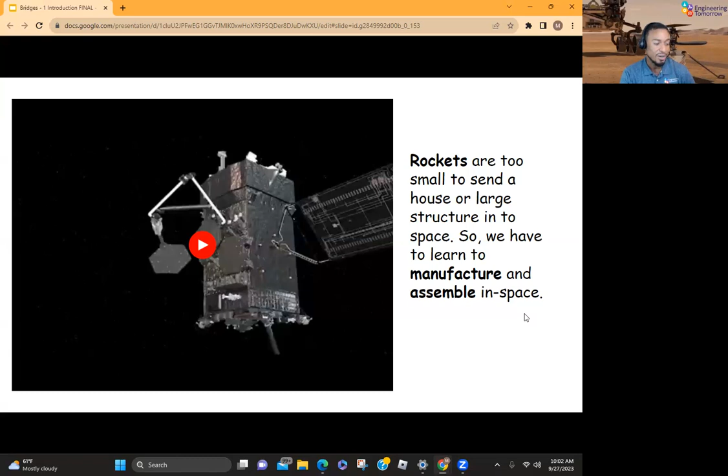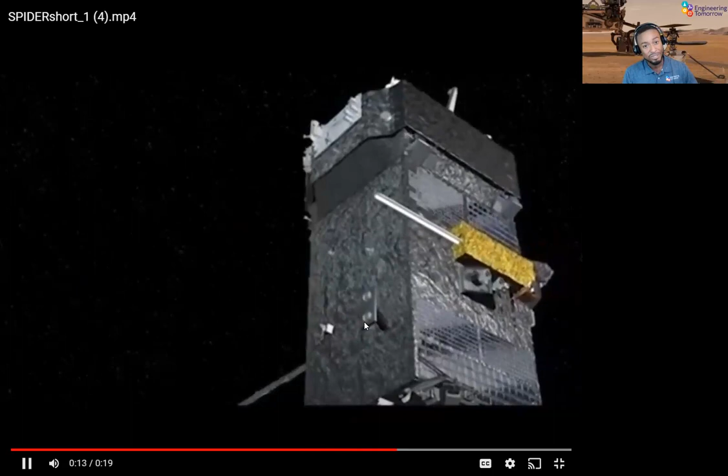What do I do? I am blessed and absolutely honored to be a space vehicle manager for a mission called OSAM-1. And the reason it is so awesome is because we're going to be fixing satellites in space, give them a little more fuel. We're going to build some structures in space, all of that great jazz. We're even going to build things in space like infrastructure, just like bridges, which we are talking about today. Maybe it'll be a bridge like this one day where we're building different structures to navigate the next satellites into space. Maybe doing some additive manufacturing on the moon, right? We would love to go to the moon.

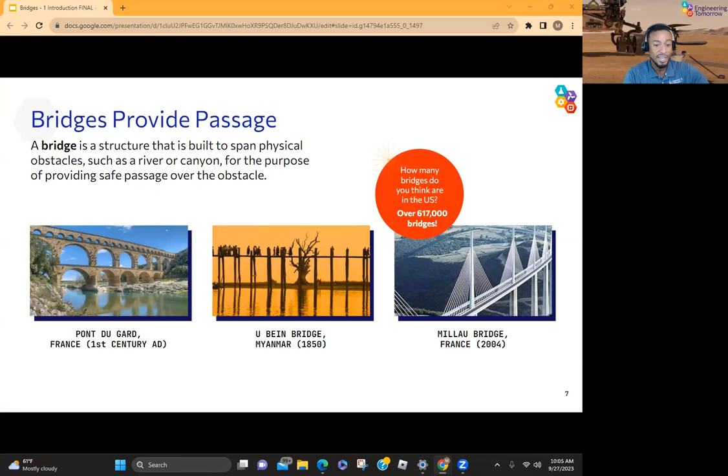And this is one of the reasons, you got to look forward to this. We're going to have a really great speaker for you today, Avery Bang. And her entire career has been around helping people that have limited resources by giving them access through bridges. And this fact alone, over 1 billion people don't have safe year-round access to education, to healthcare and markets. And Bridges to Prosperity, a shout out to her company. Bridges can give us that.

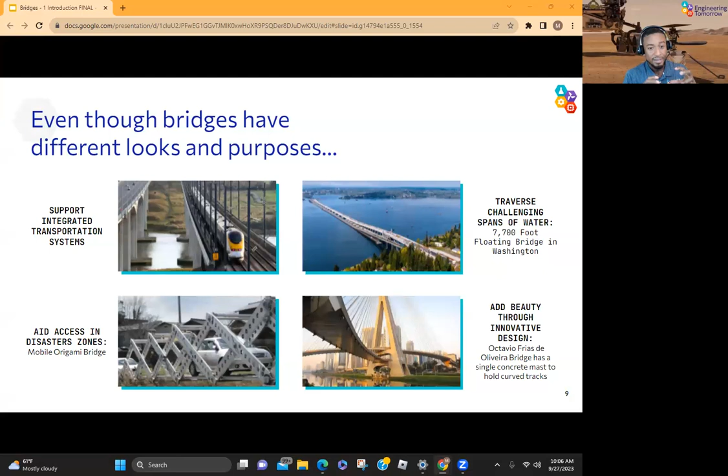All right. So let's talk a little bit about bridges. They may look different and they may have different purposes, but the beauty of it is, and when you can develop your own bridge, they all are built on the same fundamentals, right? You want to make a bridge that can support the absolute most weight while being efficient, while not utilizing too many resources. And you do this by controlling the forces.

Now we have some of the forces on this page. We have compression and we have tension, but there's also torsion. There's the twisting force, right? For longer structures, there's buckling. There's a buckling force you have to overcome. There's shear, the sliding force. All of these different forces are acting against this bridge, just like with you all in life.

There are different forces in life that act against you. There's pressure in life that acts against you as you try to make sure that you're doing the right things and moving forward and executing the vision you have and having fun, right? Getting through school, there's a lot of pressure. Social media, there's a lot of pressure. So what this all comes down to, just like in life and with your bridges, is how you balance all the forces. Can you balance them all? Right? Torsion, twisting, shear. Can you make sure that the structure is still sound through all those forces? And we're going to show you how to do that today.

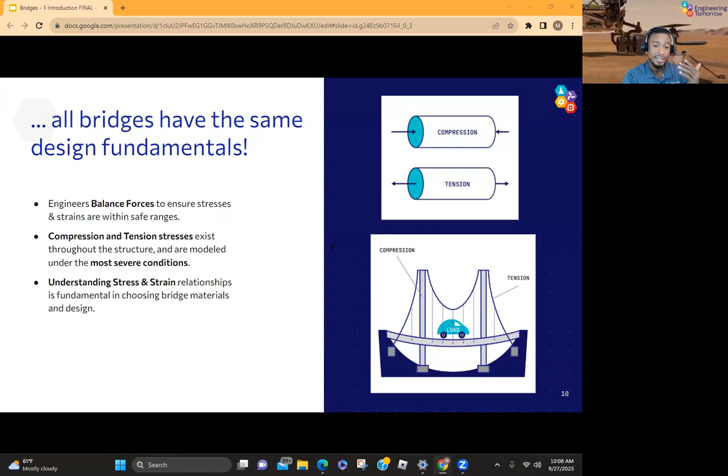And the other thing I really, really love about bridges is that in engineering, you can be innovative. You can still be creative and artistic. Yeah, you balance the forces. Yes, they provide safe passage, but look at the artistry that they've added to these bridges in creating safe path. Unbelievable. So we want to give you some tools. Let me give you a few tools for you to think about as you're creating these great bridges.

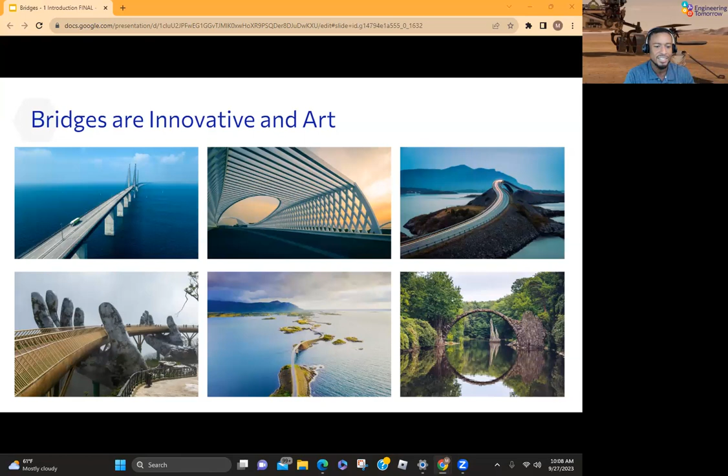Here are some really, really good shapes and structures, because shape matters. Shape is really, really important. So one, there are beams, right? I'm highlighting some beams that you can utilize to provide good support. And when you have a beam, it doesn't have to just be straight across. If you add arches to a bridge, that shape is probably the strongest shape you can create. But if you're using like popsicle sticks and stuff, it may be hard to create arches, right?

There's also trusses. Triangles are very, very strong. Include some triangles in your design, and that not only distributes the load, but it increases how much strength and inertia that you have to be able to support more. So I talked about arches, and we talked about trusses. There's also some cable-stayed and some cantilevers that you can use as well.

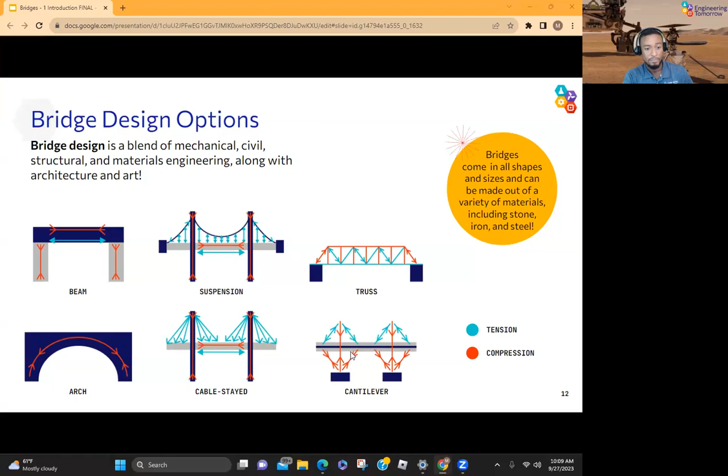So let me give you a little timeline. How did all this come about? Well, these bridges actually came about because trees were falling down across waterways. And people noticed, if I take advantage of this structure, this tree, I'll have safe passage all the way across this waterway. So they started very simple. And then people started to take advantage of, like you see on here, these Roman arch bridge shapes.

What shapes that we talked about can you identify even in this structure? You definitely can see a triangle, right? Even in this structure, you can see an arch. That provides a lot of strength to the bridge. And then they realized, hey, this is a lot of material to utilize. We're not utilizing this material efficiently.

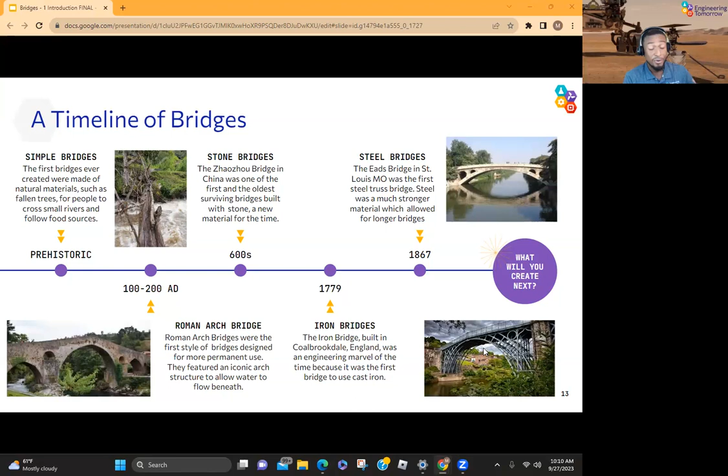Why don't we start incorporating things like concrete and steel and still have these very strong shapes. You see the trusses, you see the triangles, you see the arc, but far less material in order to create and maintain the structure on this bridge. So the big question is, what are you going to create? And that's what you're doing today. As a recap, you're going to develop a bridge, a functioning bridge that can support absolutely the most weight.

It's going to balance all the forces: compression, tension, shear, twisting, buckling, all of that. It's going to be designed using a very important tool as well, and that is the engineering design process. We're not going to leave you out there by yourself when you're lonesome. This is the ultimate tool.

It's the same tool that I've used to develop spacecraft like Artemis One. It's the same tool that they used to get the rover to Mars. It's the same tool that they've used to create outstanding medical devices that have given people an opportunity to have a better quality of life. So you don't just have at the design, which I love to do. I love to design, so I just have at it.

You start by asking some questions. First, what problem am I trying to solve? The problem that we're solving today is, can you support the most weight with the least amount of materials? And then, what research can I do? How can I learn from other bridges that are out there? How can I learn from other structures that are out there, right? Do a little research, then you design.

And if you design and you draw it out on paper, or maybe even do it in something like Google SketchUp, whatever tool you're going to use, before you build it, I promise you, you're going to make a better design. You're going to have a better design in the end.

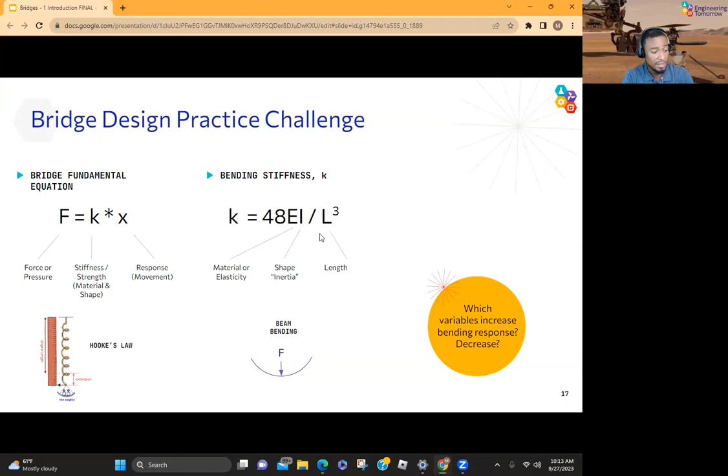And then there's an equation. You're like, man, Milton, why are you throwing an equation at me? There's an equation that governs all this. You may not need it today, but just to understand what's involved with the stiffness of the bridge, it's the material. This material, or elasticity: every material has a different elasticity. A rubber band has a different elasticity than a brick, which is extremely stiff, right? So you take your elasticity, you take your inertia, which is your shape. The triangles have more inertia, it's just in the shape. And you take your length, and that drives how stiff something is going to be.

And then, on the backside of that, when you have all that information, you can calculate how much it's going to deflect. And you want to minimize this deflection. So the more force you have, the greater the deflection. But the way that you reduce that deflection, how much it moves, is by its shape or by the stiffness of the material, the elasticity of the material. Those are the knobs you have to turn, right?

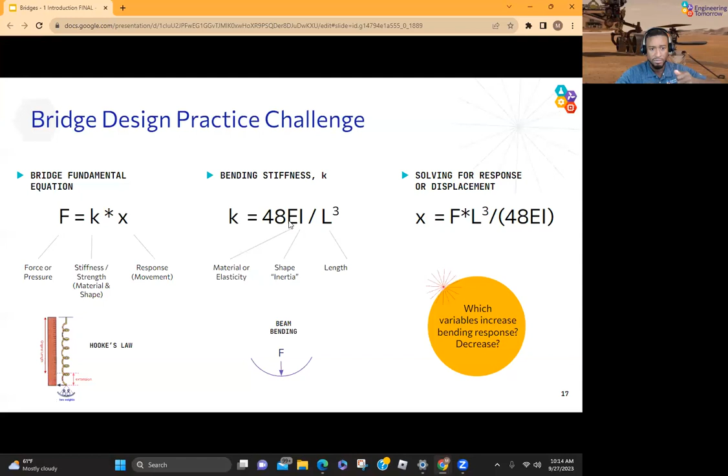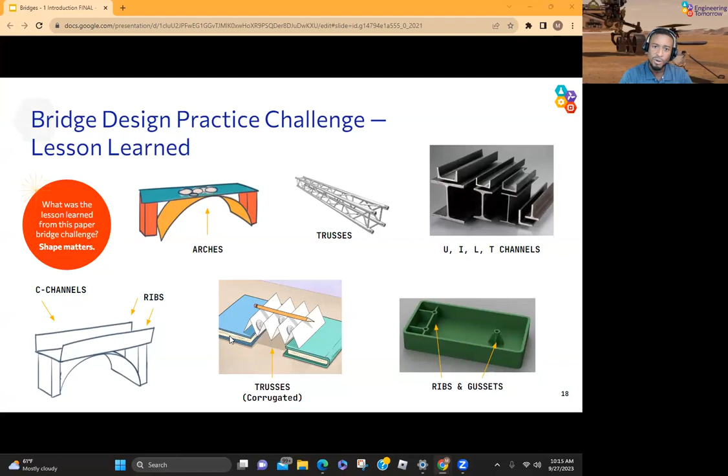Let me show you shape. Again, these are the shapes. Here's an example. An arc, a very strong shape. An I-beam, something that's taller with less material on the inside, less mass, extremely stiff shapes. You've probably seen it in ribs designed in certain structures. So try to incorporate this as much as you can. You probably get Amazon boxes. If you cut open that Amazon box, you'll see something called corrugation, because they have triangles and arcs in the corrugation to make it strong.

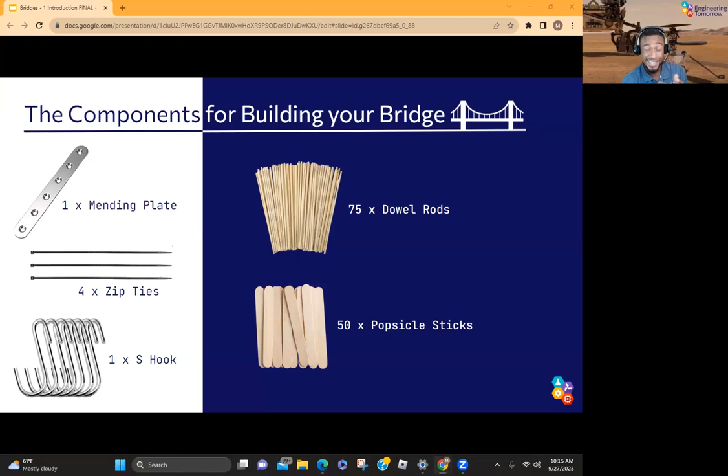All right. So here are some of the materials that we've given you. To test it, we've given you a mending plate. So you'll hook up the mending plate to some hooks, but also to make the bridge, we've given you a bunch of different dowel rods and popsicle sticks that you can put together with some glue, or some tape. That's part of your engineering problem. Do you want to use glue? Am I going to use tape? What are the benefits of using glue? What are some of the benefits of using tape? You got to figure all that out as you're making your bridge.

And as a recall of what we talked about first, what's the problem you're trying to solve? That's very important. Do a little bit of research before you start making your design. Create a design solution, maybe on paper, to kind of think it out with your team. How do we want to make this bridge? Then you build it. And after you build it, don't be afraid to fail.

Every innovation I've created, every patent that I have obtained, it's all come through failures. It wasn't the wins. It was things that I learned by failing over and over again. So you want to test it, and then you're going to analyze those results. And that's our challenge today.

But to make it fair, right? Because we can't have, let me see one of my schools out there. It's not fair if Mount St. Michael has titanium, and then Challenge Prep Academy, we only give them plastic. Or Mount St. Michael can make a small stiff bridge, and let me get another school, CMIT has to make a long bridge. So to make it fair, we're going to give you some constraints.

Here are the constraints. One, it only can be 12 inches long. Everybody's is going to be 12 inches long. All right. And then two, 3 inches wide or less. Okay. That gives us some constraints there, some boundaries by which we all can make sure this is fair.

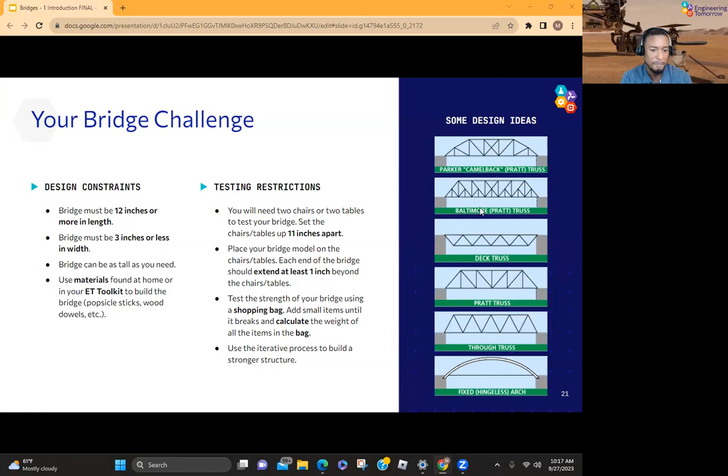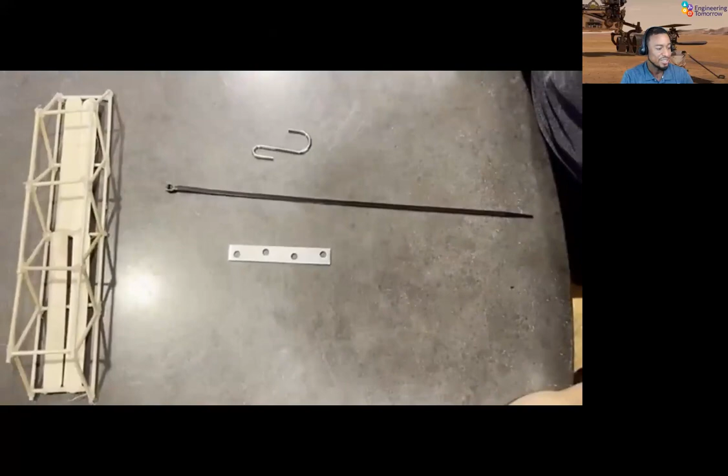Okay. So I'm going to show you an example, a really, really great example from a really, really great young engineering intern that we've had here at ET on how they tested this bridge. So you're seeing they have the mending plate, zip tied at the beginning, and they put the support. And look at that, the materials. They didn't use too many materials, very clean design. The mending plate is close to the center of the design.

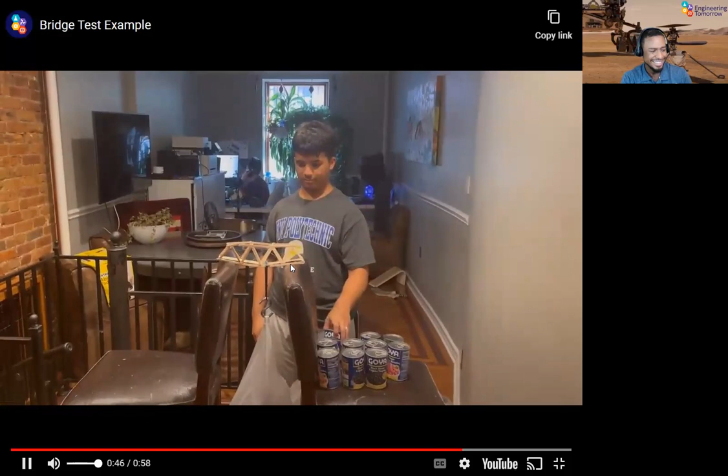Question for you. Did that bridge break in the material? Did it break in the popsicle sticks? Or do you think it broke at the glue? Where do you think it broke? I'm gonna type this in the chat, where did the bridge break? Thank you, Betsy. Did it break in the sticks, or do you think it broke at the glue?

Oh, Lakeville. That's a good answer. Who else? The sticks. That's good. The sticks. All right. The glue. Okay. Challenge Prep Academy, it broke on the sticks. All right. East Harlem. I gotta come to your neck of the woods, East Harlem. I have to come out there for sure. Great answers, Challenge Prep. Someone said the glue. Oh, the glue. But Maria says the sticks. Actual sticks broke. Okay, Traverse City. Let's see that one more time. You all are on it.

I'm going to send this video to you so you can look at it in slow motion. All of you have excellent answers. But if you put this in slow motion, you will see that it broke in the glue. The glue is what broke apart, what was detached. And that's important in many ways. One for the bridge, but one for teams.